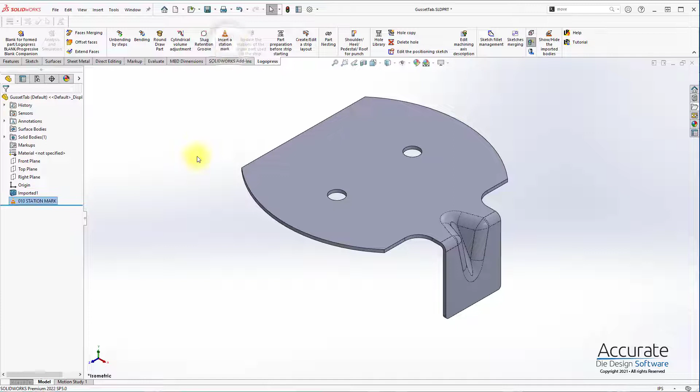We will begin by taking the gusset out entirely. We are just going to use the ProgSim tool automatic blank development, or the trim optimization, to create the punches for us.

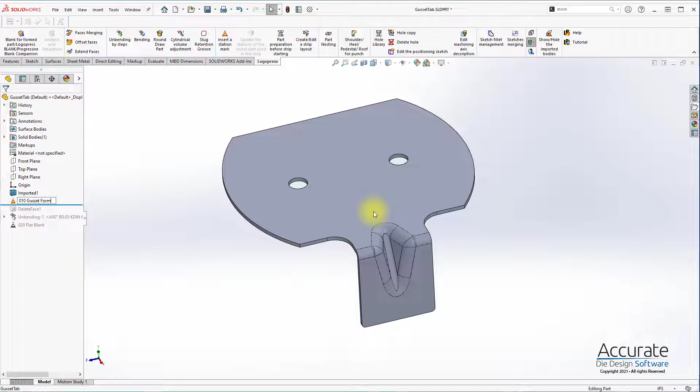All right, we can go back and name our station marks now. Save, and we'll run part preparation.

And tell it that the bottom side is die side, and that we're going to use this line, the back edge, the center of which to be the origin. Just going to create some reference geometry.

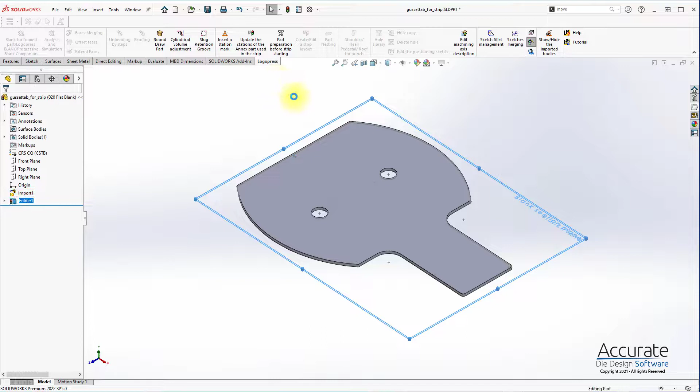And we can run the create edit strip layout command. Needs a job number, and we need to name the strip itself.

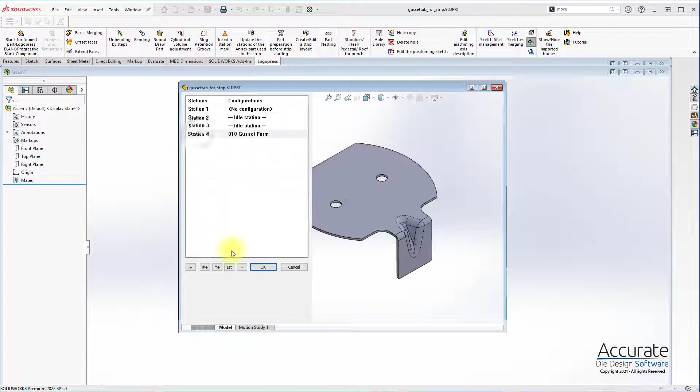We run a single out, just going to run right to left. Puts in the two configurations that we add. So we're going to have a flat, then two more flats, then our form and another one. So a total of 5 stations.

And we'll save that.

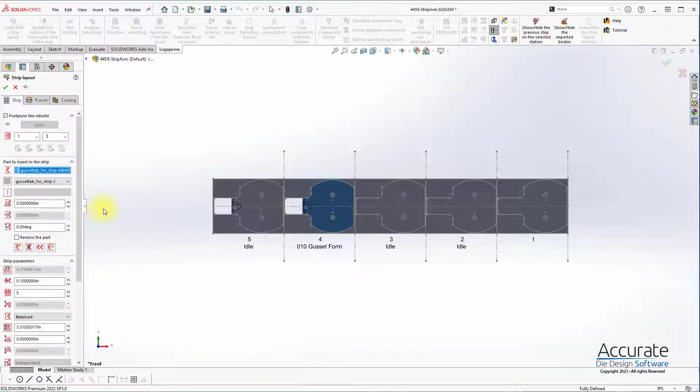Now ready to range our part. I'll rotate it 90 degrees. Can adjust the spacing between parts.

Give it 50 thousandths if we want, or we could just type in an actual value. And the same for the strip width it gets. When material thickness, we could put in a different value, or we can just type in directly. I'm also going to nudge this right off the edge just a little bit here, and I will hit apply.

Now ready to start putting in our punches. I'll start with our punches for pilots. It's asking for points where we want the pilot, but we don't have it where we want it yet.

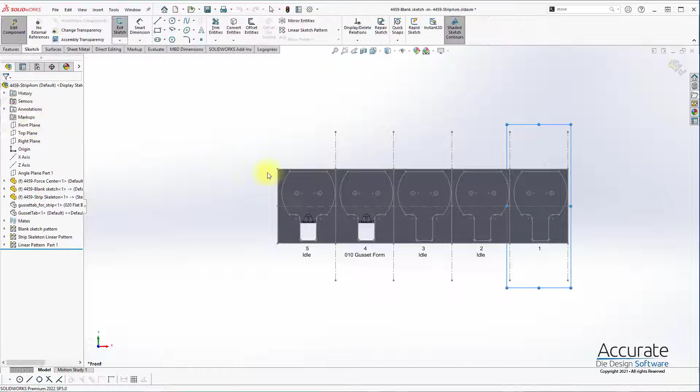So I'm going to add a sketch as a reference. I'm going to start by converting some reference geometry here. Then we're going to go center of that, and center of that.

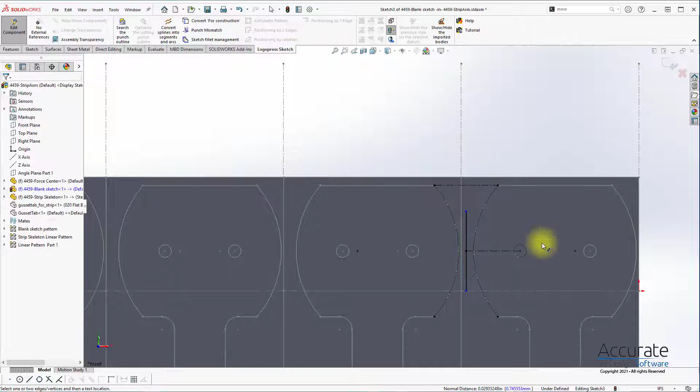And I'm going to do a midpoint line out from there. That'll be coincident. This will be... oops. There we go. Now we've got a reference.

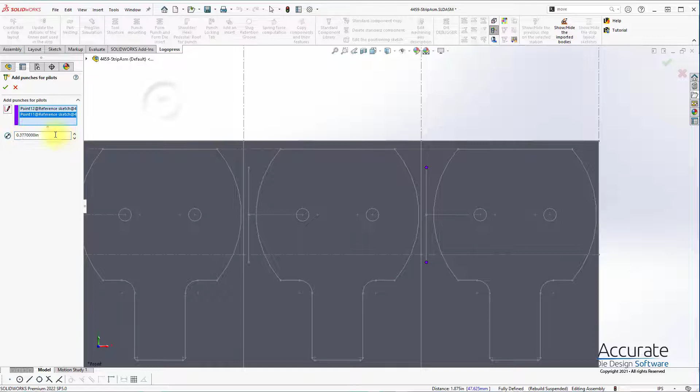We are going to put pilots here, and they are going to be 0.377 inch diameter. Going to hit OK, and it will add those in for us.

Going to add these interior cutting punches here. Going to add them in the 3rd station.

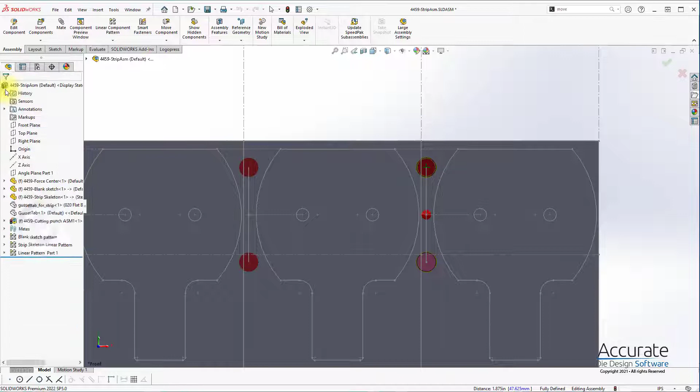Again, as we saw with the first one, it made an original punch and copied into the 2nd location. It's going to do the same for these, so that way it'll be mounted together later in our tool and also shows up as a quantity of 2 in the bill of materials. You can see that here with the colors, the dark original and the light copied.

Going to move on to our next punch here. Throw a rectangle about what we want to do, and then we will make it coincident.

And then we can use the search the punch outline sketch. It's going to find that whole area. I don't want this redundant sketch here though, so I'm going to drag this back and then back onto it.

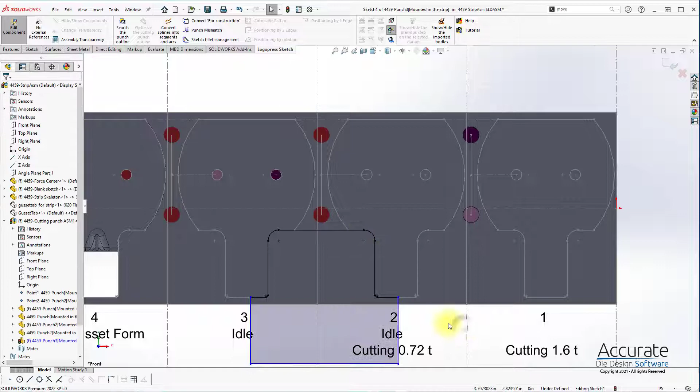Next thing we want is a mismatch here. French stop, the cutting side and the reference side. Puts all that in for us automatically.

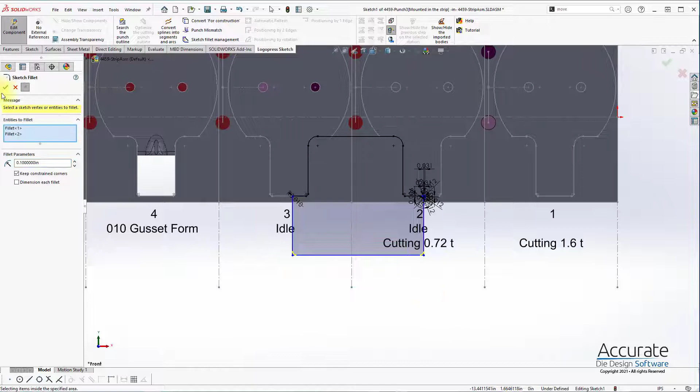We want our radius on this end and 100 thou on the back. And add some reference geometry here.

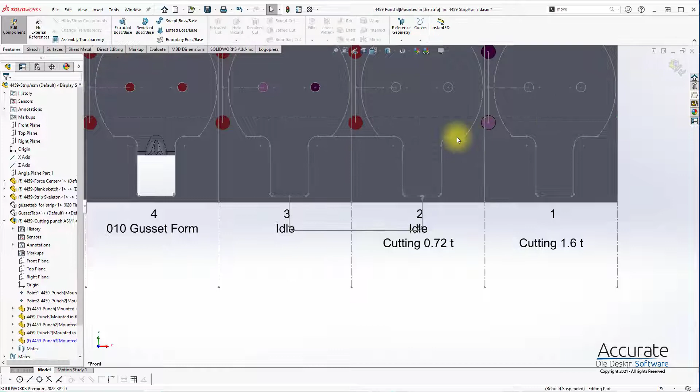That's one punch down. Get another one going here in a second. Just saying, draw a rectangle around the edge we want to capture, search the punch outline, and then we can modify. Drag that out, do our mismatch.

Put 100 thou on the back since it's already 100, and we'll add some more reference geometry.

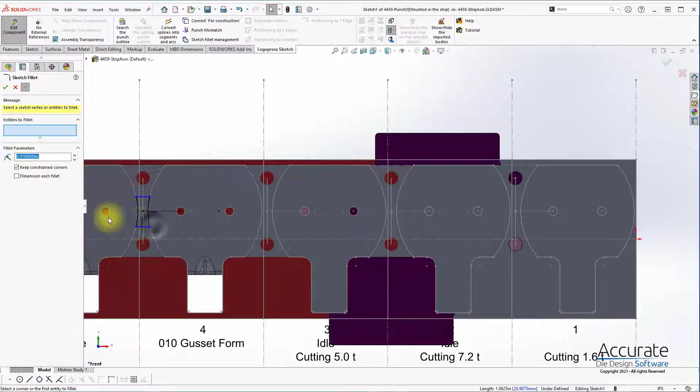And one last cutoff punch here. Make this symmetric. I'll add a dimension. There we go.

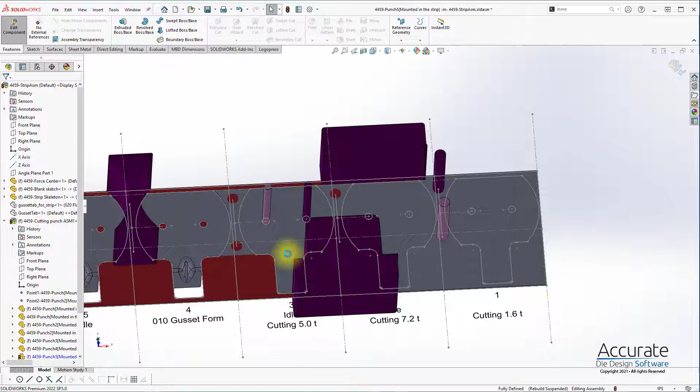You can see on the red preview here that our mismatches are lining up. All right, we've got all our cutting done. We're going to go ahead and apply.

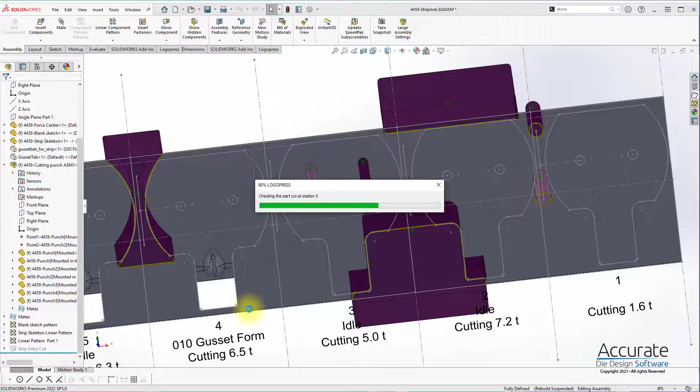Alrighty, we'll go ahead and save.

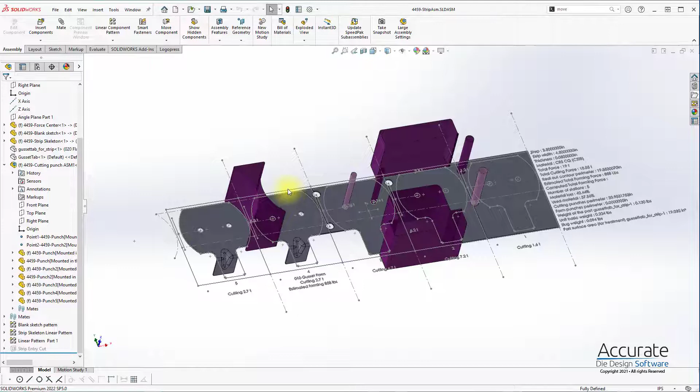Now we're going to start working on some more punches here. So from the bottom side. We're going to pick the edge that we want first, and then we're going to pick everything else. And then we're going to draw a sketch.

I want to use this edge as a reference, but I don't want to maintain that type of reference. So I'm going to make that link first, but then I'm going to come in and use my reference geometry here.

And before that can move, I'm going to stick a distance on there. So that is now essentially the same as being collinear, but it won't update with it if it ever moves. So it just happens to be on edge right now.

I'm going to keep this within the width of this here. There we go. Oops.

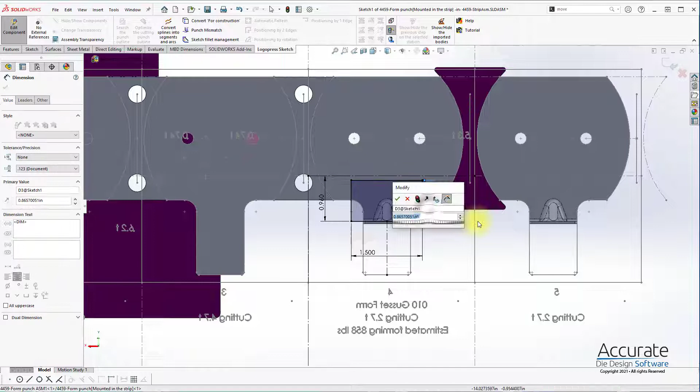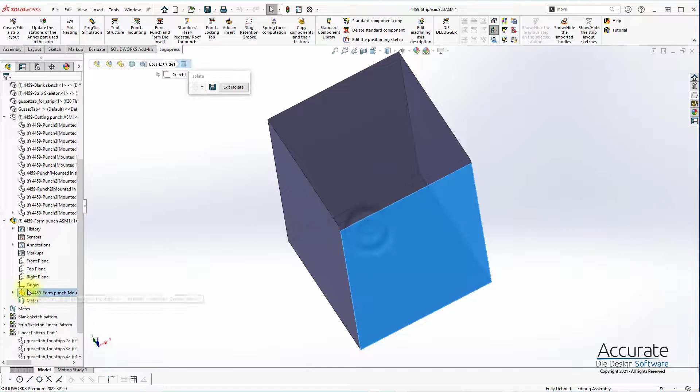All right, so this is going to make our punch here, but as you will see, has not cut the gusset at all. So I'm going to edit the punch, still in the context here.

Since I selected the surface, they're all on there, so I'm going to use that surface body with the cut with surface command and cut that off. And now we have a gusset.

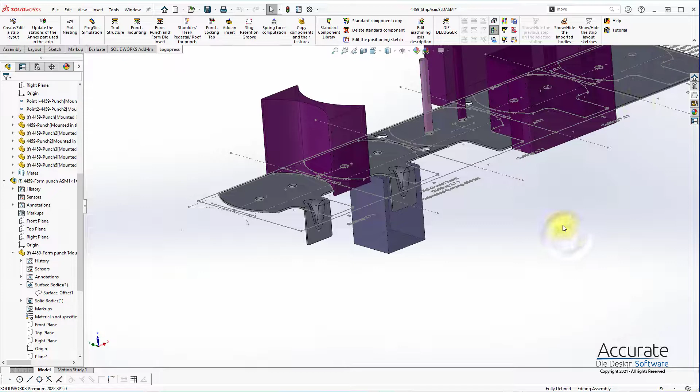Do more or less the same thing from the top side here. And we're going to pick one edge to be our bend radius as a 2D punch, and then we're going to pick all of them as our cutting surfaces. And then we're going to draw our outline again.

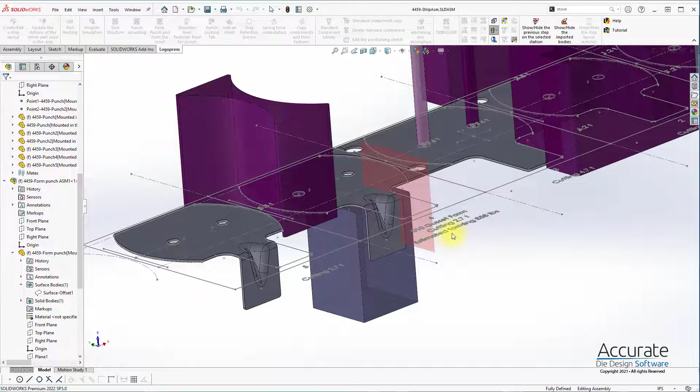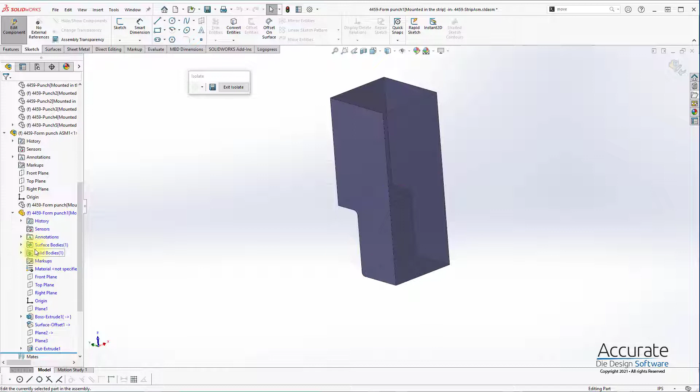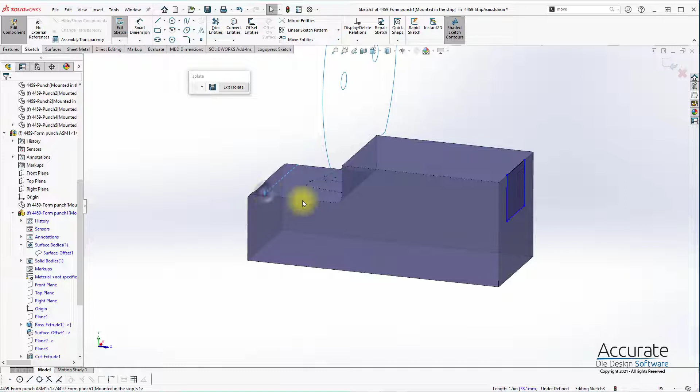I'm going to make this edge coincident. And just make sure it's wide enough for those gusset faces right here. I'm just kind of looking through and getting that in there. I could fix these or lock them down or something.

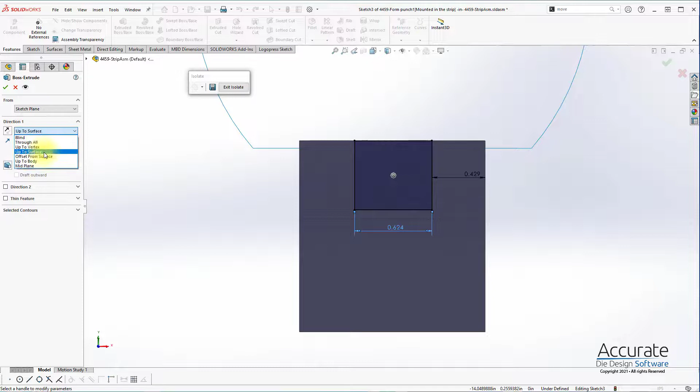We're going to extrude up to surface. So we're going to pick that surface. Oops, we're going to go that way. Oops, that way. And go up to surface. Come in and grab this surface here.

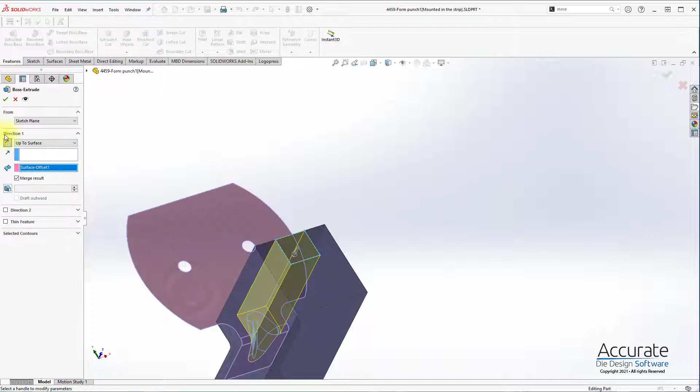Oh yeah, I can't do that in a strip context here. I always forget that, so I get out of this, out of isolate. And we take a sketch we created, we can extrude, we can do up to surface. There we go. And we can hide our surface again. There's our gusset.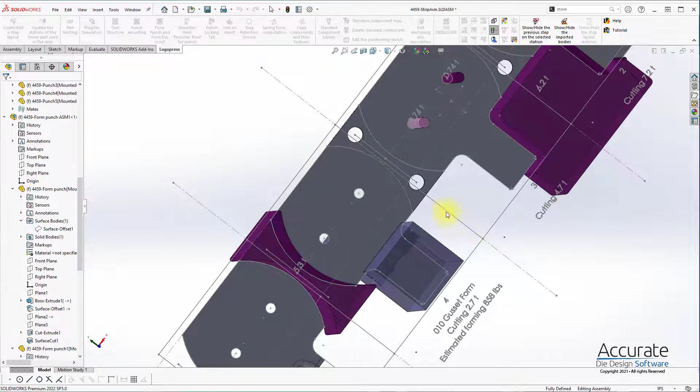And we're going to use the form punch command one last time to make our last piece of geometry, our pressure pad right here. And we just need it somewhere in here to hold this down for us.

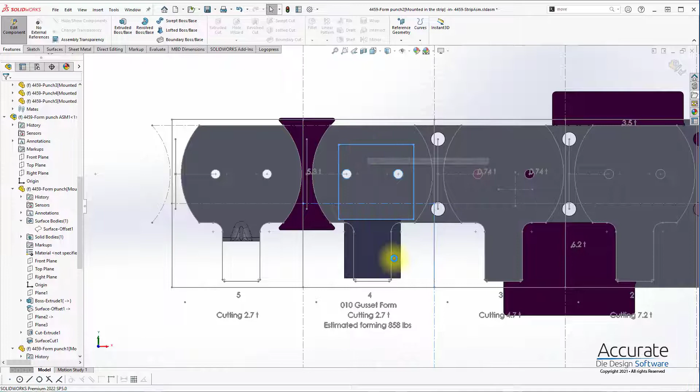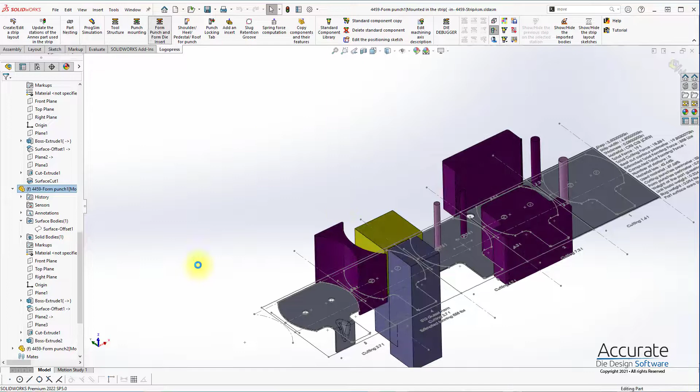All right, pressure pad. Done. Oh, I was going to change these. You can go back in to edit these just so you know. Just going to give it some color just so they're easier for picking them up for the die simulation here.

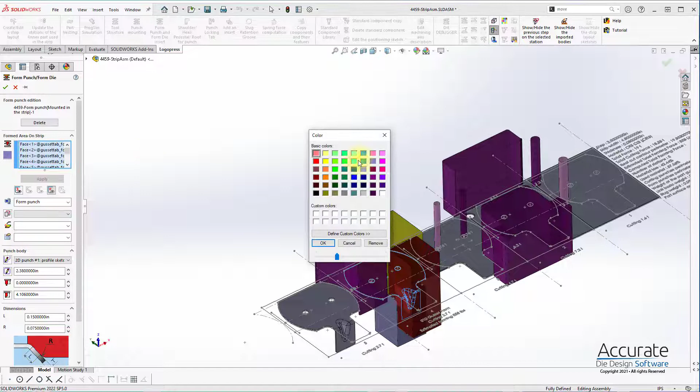Okay, we are ready to simulate. Open the ProgSim tool. It's going to start loading in a lot of the data here. It does pretty well at guessing what we want, but we still need to go through and double check that it has done what we wanted.

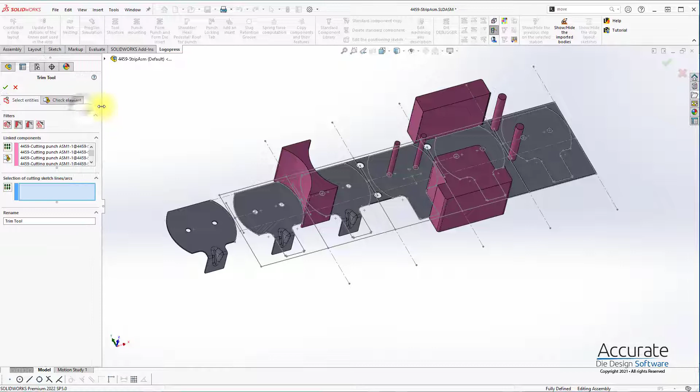Start with the trim tool. It's picked up all our punches. Show up in the check element, and we're good with that.

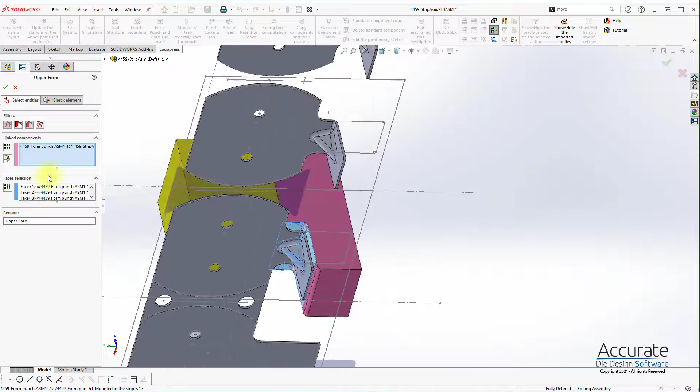Go back, move on down the list. Next one's the upper form. It's picked up both of these parts. I created them both with the form punch command. They're above the strip, so it makes sense. But we do not want our pressure pad to be a form tool. We are going to grab the last few faces down on the bottom here. And you can check and look at what we got and see that it is indeed what we want.

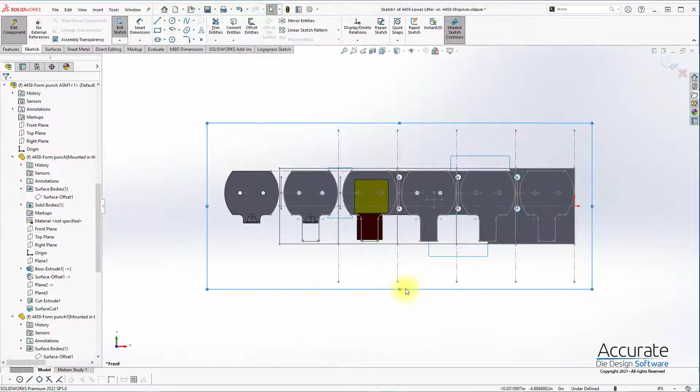Keep on going down. Next is the lower lifter. Accept the name and then look normal to draw a big floating lifter across the top here. The only thing is that we need to just watch out for the gusset. So really the only thing is just don't touch this. Other than that, nothing wrong with having more because it's just going to support more material and keep it nice for the simulation. We're on both sides of the center line, so we are good.

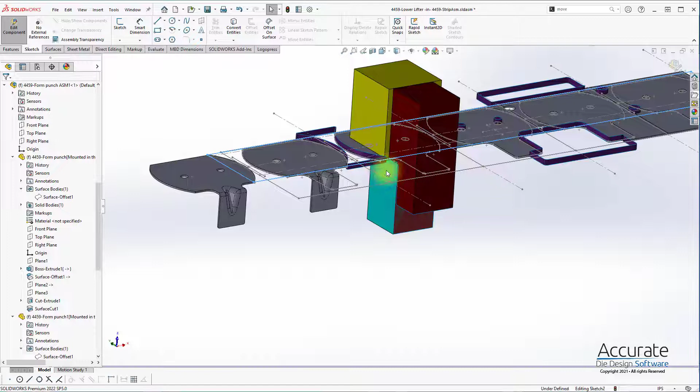Next is the lower form. It's picked up the lower form and its faces. Confirm, and we like it. The lower lifter is the same as the upper lifter, so we just made that and we know it's good.

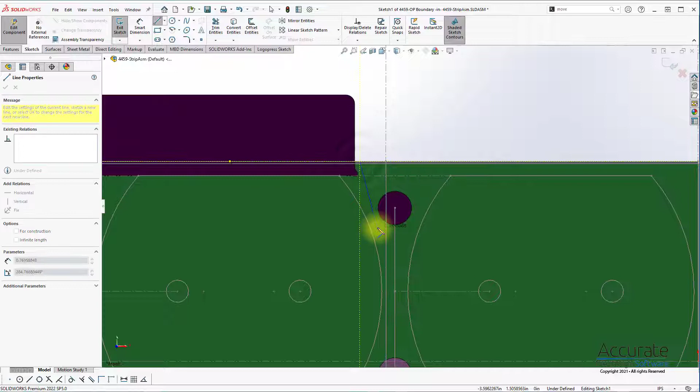Next is the OP boundary, accept the name, and then look at the drawing. And we're just trying to divide the part one from the next. What my goal here is to try and include some of the skeleton here. I need to go all the way out to the edge because this is going to define the shape of, or the width of, our material. But I'm going to come all the way into this center line here.

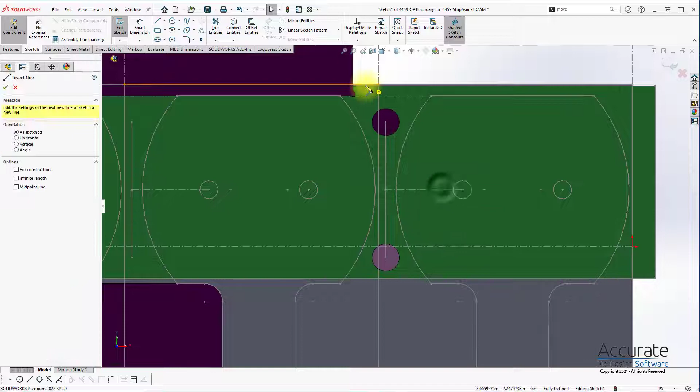And the goal, my only goal here is I'm trying to put one lifter or one pilot in one and one in the other. I think I can actually just come all the way across with this. Go away, or not. Close enough. There we go. So that's fully divided the part.

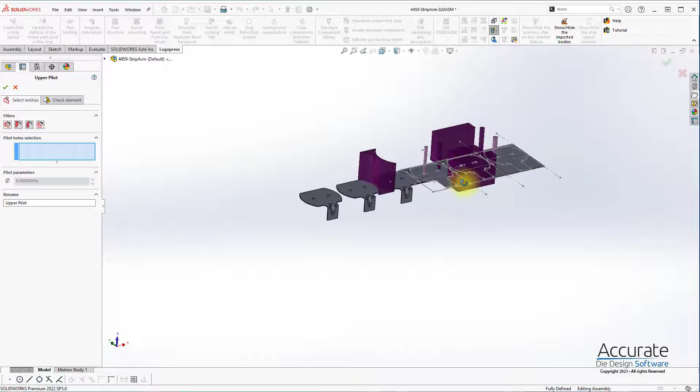And I can draw that in any station, and now it's patterned it all the way down. Pick our pilot holes, I'm going to hold Control. Pick the edges. It's going to pick up on the pattern of the edge up until it gets recognized as a cutting punch. So I just do that for both of those, and it picks up the second one.

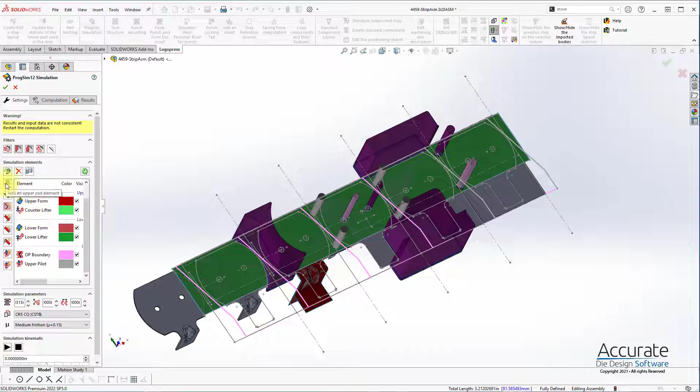And the last thing we need here is our pressure pad. I tell it this block did not pick up the face. I'm going to pick through the hole here. So I'll tell it there's 2 inches of stroke, initial force of 2,000 pounds, and hit confirm.

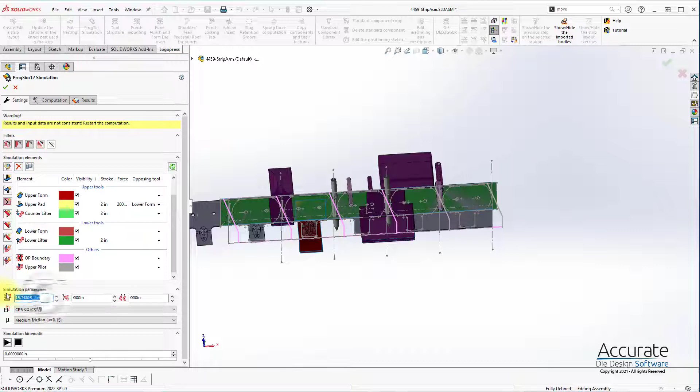We've got our basic strip stuff set up here. Go down to the bottom, get the rest of our stroke. The lifter is going to move the same as the pad, 2 inches, and we're going to make the lower lifter 2 inches as well, just for the sake of convenience. The overall stroke is going to be 8 inches.

No, we can make it even shorter. We can make it 6. Thickness of the part is indeed 50 thousandths, and the progression of the part is indeed 3.5. Got our cold roll material selected, and we're going to use the medium default friction. We can, from here, go ahead and hit compute to make sure that our simulation makes sense. And then once we know that it's working, we're going to set it up to optimize the cutting punches.

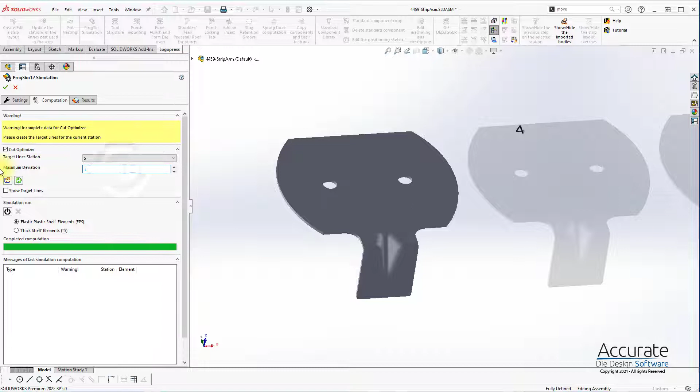All right, so the simulation worked. We're going to come over to the computation tab and ask it to run the cut optimizer. Use this fifth tab here. We're going to ask it to go within 10 thousandths, but it probably goes even closer, so let's ask for 7 thousandths. We're not going to ask it to optimize the whole part, just the tab, because the rest of it is being carried and cut and isn't really being developed, so it's only this tab part that matters.

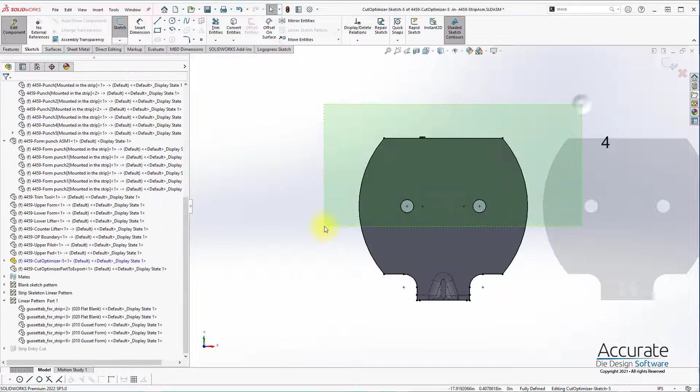So it's identified the outline. I'm going to create a sketch, come in here and grab all this extra stuff, and delete that. We're also going to drag this back from the edge a little bit, which helps the simulation. Now we've got the edge of the part defined here, and we're going to tell it please get within 7 thousandths of that. So we're going to go ahead and launch the computation again.

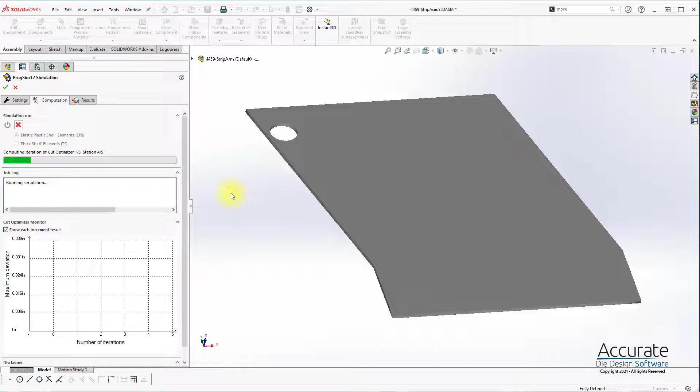It's just going to run through basically the same simulation over again. It's going to compare to that line we gave it now.

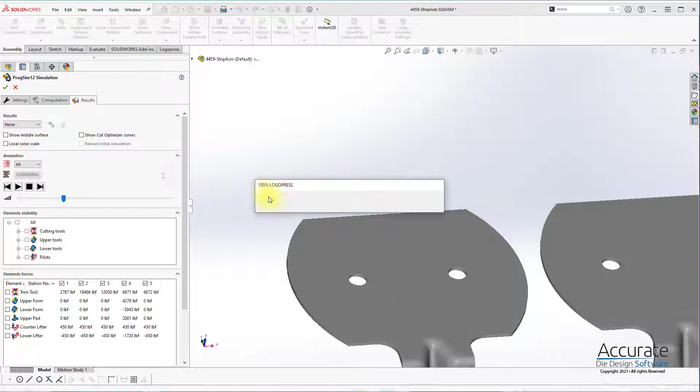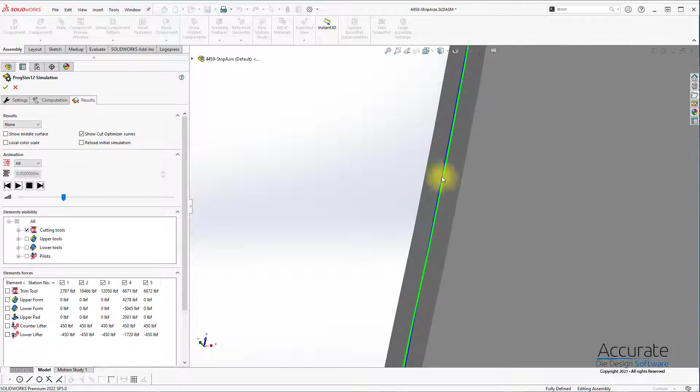Alrighty, so we can see the cutting punch that it has suggested, and given the green line here, we're now fully within 7 thousandths. Let me click on it. Maybe not. Anyhow...

So we can take a look at the formability if we like. It's indeed a formable part. Spring back here, got 6 thousandths worth of spring back.

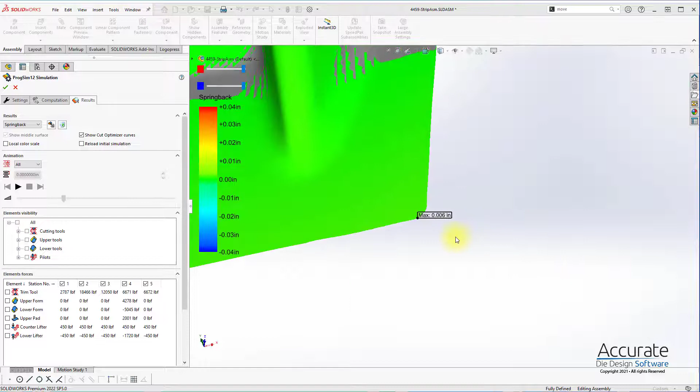So now the next step is we've got this cutting geometry in our simulation. We need to make that back into our form punch here. That is basically just a polyline mesh line that was made for that, and it is not nice geometry that you want to cut. So we're going to go into this punch here.

Logopress has a tool called Optimize the Cutting Punch Outline, and it's going to bring in that polyline that was used to cut the part in the simulation. It is just a line right here. This is not a line, it's not even really a spline. It's just a...

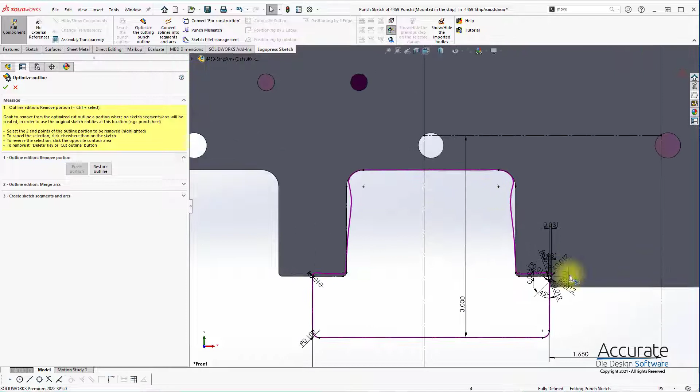So what it's saying is, do you want to use this whole thing, keep it all, or do you want to retain part of my old geometry? So I'm going to click here and tell it to delete all of this. We're going to erase that portion, and it leaves the front portion all in the magenta color of the line.

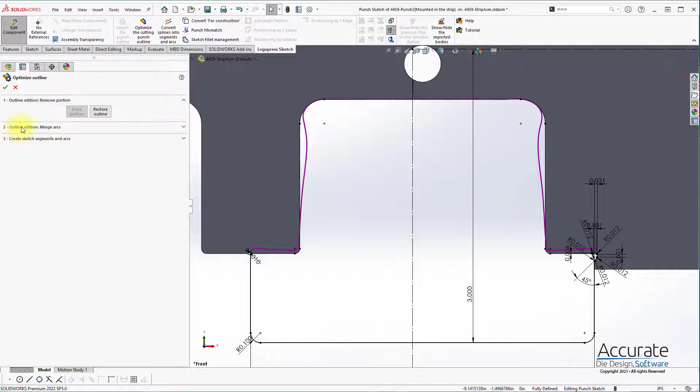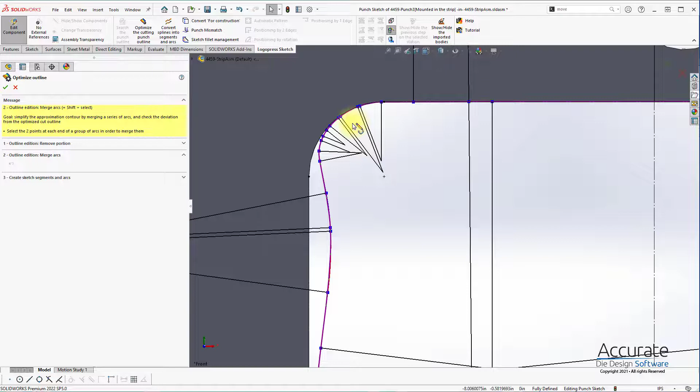The next thing we can do here is go to the outline merge arcs command. It's going to try to divide this down into lines and arcs. Each of these is an arc, with maybe space between it or not, tangent to the next arc — a flat, an arc, a flat, an arc — and each of the triangles is kind of the radius of the arc that it's on. So we can look at these and decide if we like what it's come up with. We're going to try to merge some of this, try to make a little less choppy outline.

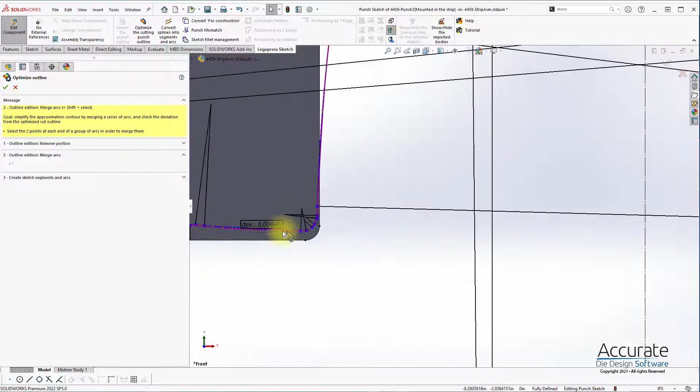Most of what it's come up with is pretty good. I'm not going to try to merge too much of this here, but at the end of the day you can still just come in with SolidWorks sketch entities and change what you like. But most of this is pretty good, so I'm just going to go ahead and hit OK. And it's going to make this into actual sketch elements now.

All right, the last thing we need to do is connect this back up. So I'm going to window that, get rid of that, and get rid of that, and I'm going to put our 10 thousandths fillet back on the edge here.

And we're going to come over here, and I'm going to wipe out all of this for similar purposes. Oh, can't be in the fillet command. Wipe out all of that because we don't want that anymore, and we'll wipe out that. And we can do the same with the punch mismatch command.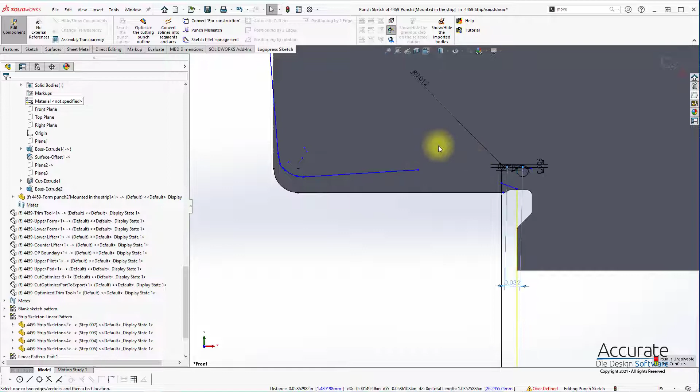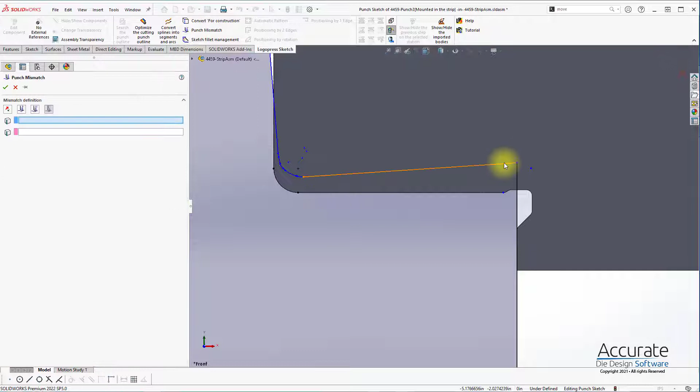Maybe not. Let's try that again. There we go. Just got our mismatch back on there.

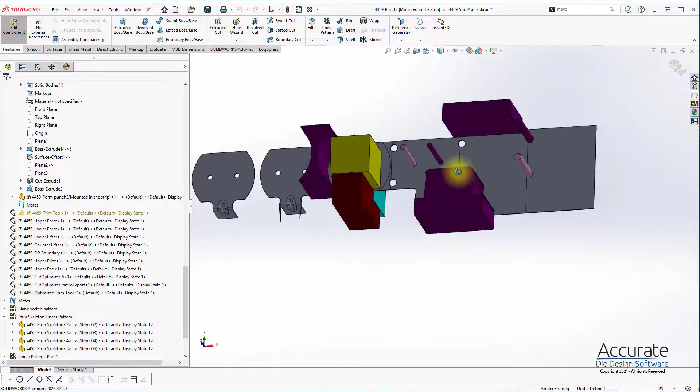So we can go attempt to simulate that punch again or not if we like. The only other thing we might want to do here is hide this punch. We're going to get rid of these extra bodies here, edit the skeleton, and find these two bodies that we want to get rid of — this one and this one, and maybe that one too. I'm going to delete that one too, and we're going to use the delete bodies command and delete it.

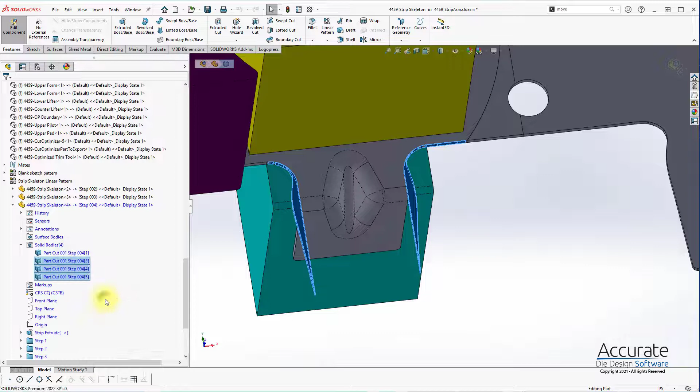And that's now at the bottom. Then we're going to use the Logopress suppress on the following stations, and it's now gone on the rest of them. There we go — nice, pretty strip. And we'll save that, and we're done.